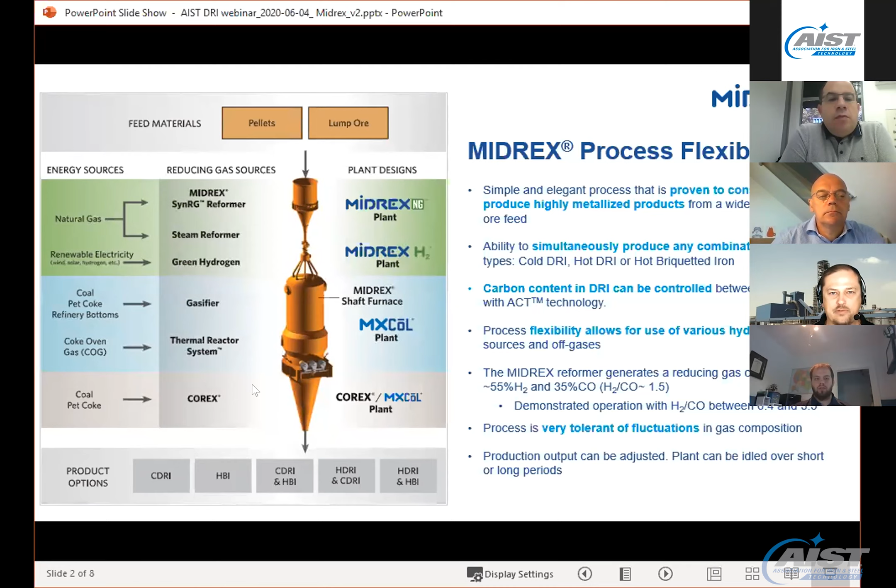So I know the title of the webinar is Ironmaking with Alternative Reductants, but really what the main discussion is going to be around hydrogen. We've been working for several years on an adaptation of the Midrex process to green hydrogen, and we call it Midrex H2. We believe that advances in green energy and power generation and in hydrogen generation from electrolysis can be a game changer for the industry.

Until recently, direct reduction was really limited to places in the world that had natural gas, but hydrogen can be produced pretty much anywhere in the world. So the main driving force for this transformation is going to be CO2 emission and their reduction. And it's generally accepted that the only technology that's proven that can meet the Paris Agreement for CO2 reduction is hydrogen direct reduction coupled with an EAF.

Nowadays, many countries have their own hydrogen roadmaps, and I've looked through some of them, and every single one that I've seen - U.S., Germany, Australia - they talk about hydrogen DRI as the way to achieve those CO2 emissions. And even the IEA, the International Energy Agency, their technical roadmap for hydrogen references direct reduction with hydrogen. So it's really accepted that it is the promising technology for reducing CO2 emissions in steelmaking.

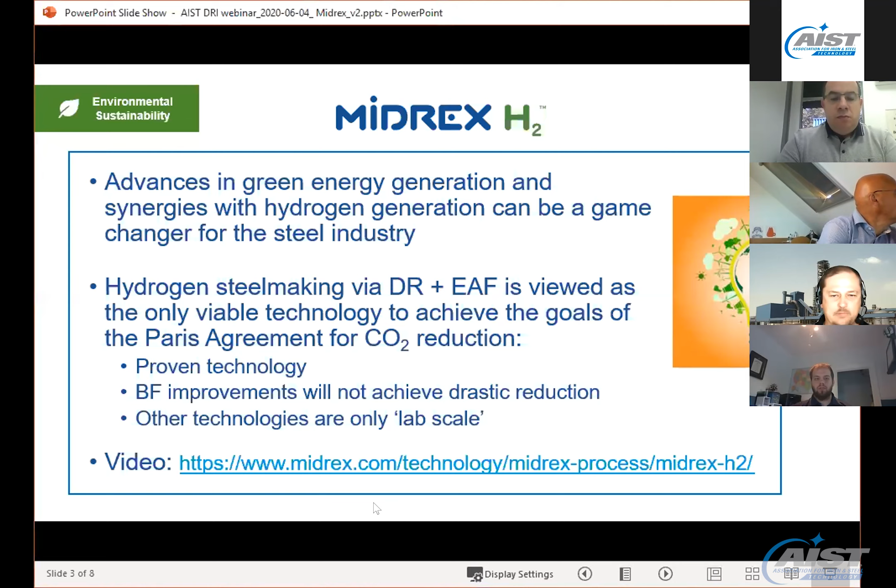We've made a short video, it's about 4 minutes long. I don't have time to show it today, but here's a link to the video, and it kind of highlights how we view that transition. I really encourage you to get on the Midrex website and view that video. It's really well done, and the team put together something that we're really proud of.

So this is the main slide, and it's kind of the summary of what that video shows, which is that transition from a fossil economy to a hydrogen economy, and how the Midrex process can be adapted to switch from natural gas to hydrogen. So with the Midrex process by itself, it's possible to use natural gas and reduce CO2 emission nearly by half immediately, just by switching from coal, coke to natural gas.

The numbers here, the 500 kilograms of emissions, that might seem a little low for people that have looked at these numbers, but here for illustration purposes, I just put strictly the emissions from the Midrex plant, so they are really scope 1 type of emissions.

So as hydrogen becomes available, and we can inject hydrogen into the Midrex process, we put down 3 cases, again just for illustration purposes, and the numbers are just kind of rounded numbers for discussion. But the first thing you'll see is that the amount of hydrogen in the reducing gas goes from 55% to 62, 72, 77%. So these are actually pretty small transitions in the composition of the gas.

That's why we're very confident that we can use these gases for direct reduction, because they're not really drastic changes from what we do typically with a Midrex NG plant, and definitely well within the range of what we've done with other technologies. You also notice that the carbon in DRI is decreasing as you put more hydrogen, and that's strictly because we're putting less carbon molecules from CO and from methane into the process. So there will be less carburization done.

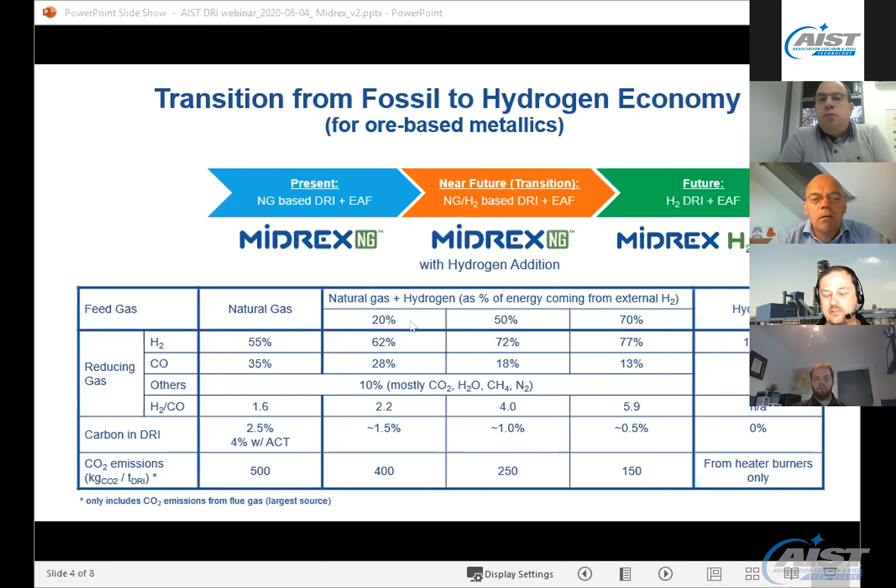The case on the right-hand side, the Midrex H2 100% hydrogen, is the design that we're working on with ArcelorMittal in Hamburg to demonstrate that it is absolutely feasible to produce large quantities of DRI with 100% hydrogen at an industrial scale.

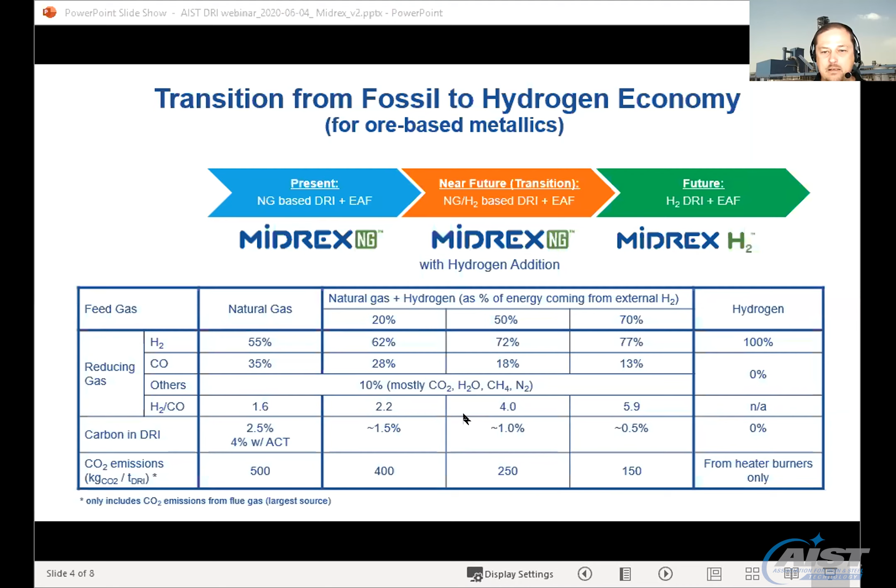The next slide here is an illustration of the Midrex process. So again, we've changed our existing flow sheet that we were presenting before to this kind of simplified format for easier understanding.

But the hydrogen is injected into the process loop, and the location can change, but this is a good place to inject the hydrogen. As we go higher in the amount of hydrogen, we have to have steam in the process, and it's mostly to protect the reformer. So there's a transition point at which steam needs to be added, and the steam can really come from other parts of the plant. If you're an integrated plant, it can come from heat recovery types of systems, it can come from an auxiliary boiler. It's a low pressure steam, so it's a very simple technology.

Also, the hydrogen itself can come from many places. It could come from a pipeline. It can be green hydrogen if you have access to it. It could be any other color of hydrogen. For direct reduction, a hydrogen molecule is a hydrogen molecule. It doesn't matter where it comes from, so we can use it either way.

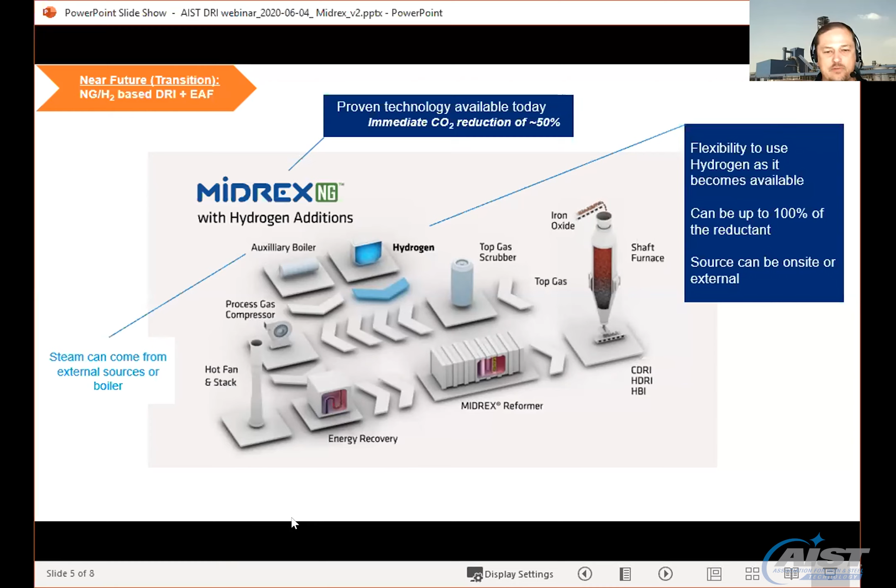There are some electrolyzer technologies that can be better integrated in the flow sheet, especially solid oxide electrolysis, because it operates at higher temperature and low pressure, which are very close to the Midrex process. So if that's the case, we can do a little bit more process integration or optimization of the whole system with that type of unit.

But really, it doesn't matter where the hydrogen is coming from. We know that you can reduce iron ore, and that selection, whether we use an over the fence type of design or an integrated type of design, is more a function of what is available at that particular location. So we're not really selective on any type of electrolyzer technology. Depending which one we want, there are pros and cons.

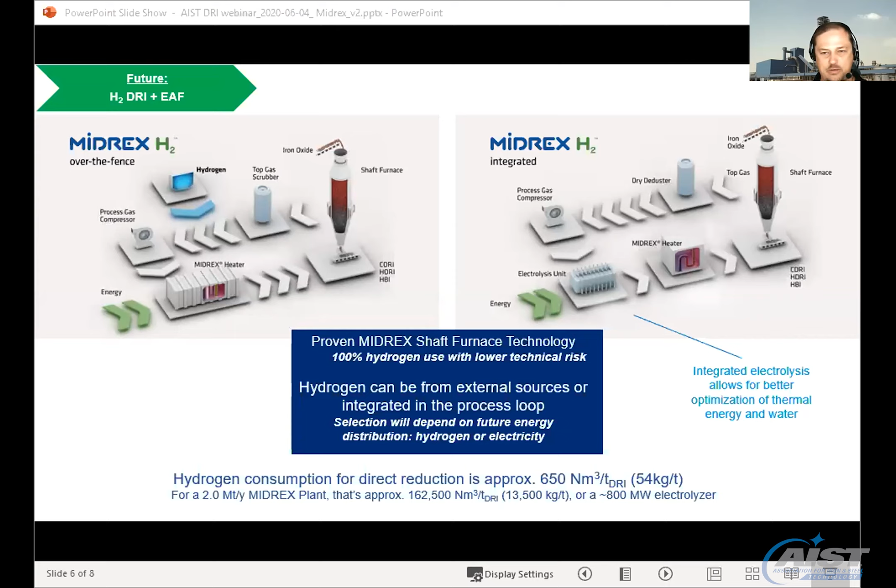So as a conclusion, what I was trying to show is that the Midrex process is a proven technology that can be used today to immediately reduce CO2 emissions using natural gas, but it can also be the bridge technology as hydrogen becomes available in larger scale. It will take years before we can get the volumes that are needed for 100% hydrogen, but it is absolutely possible to build a plant today using a little bit of hydrogen and more as it becomes available. And basically that plant will be ready when the hydrogen economy rolls around.

Our oldest plant is in Hamburg. It was built in 1971. So these plants are really designed to last for a long time. So we think the flexibility of the process makes it very suitable for that transition. And like I said, it's very suitable for the variation of hydrogen availability that we expect, especially if it comes from solar or wind power.

I didn't discuss much of the obstacles for adoption, and that may come up during the Q&A. But ultimately, it is about the cost and availability of hydrogen, and that cost and availability is especially driven by electricity generation. So using hydrogen for direct reduction at scale is not going to be feasible until the cost and availability of CO2-free energy is at the scale that we would truly need.

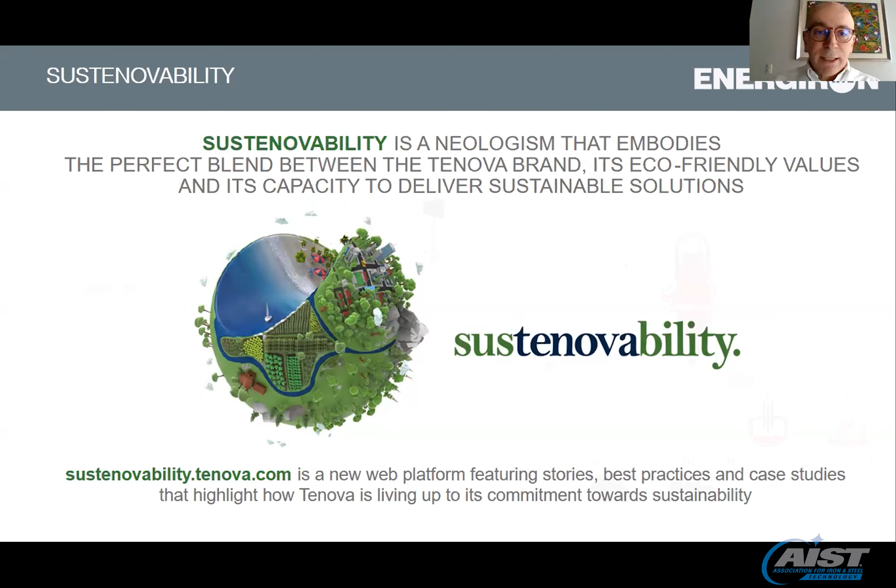Together with Danieli, at Tenova, we keep innovating the Energiron direct reduction technology on the base of proven and reliable solutions. In particular, at Tenova, sustainability has always been a pillar that supports every project that we undertake. And we have invented this neologism that blends the Tenova brand, our eco-friendly values, and the capacity to deliver sustainable solutions. And you may see most of our case study best practices in the platform sustenovability.tenova.com. Let's go to the technical part.

You can see that the Energiron technology has three ingredients. They made us the right solution and benchmark for decarbonization of ironmaking. The three ingredients are: first, we have an intrinsic CO2 absorption plant in our process scheme that allows selective removal of CO2 and the capacity of CCU and CCS. The second part is the capacity of producing high carbon DRI. We're the only one that have produced tens of millions of tons of high carbon DRI, and we will see how this contributes to the decarbonization of the industry.

And the third one is the flexibility. As you may see from the process scheme, the same identical scheme is used for any makeup gas, so natural gas, reformed gas, coke oven gas, hydrogen, a mix of all the above, and also transitioning from one to the other, and also for giving flexibility to the product itself. But let's start from the removal of the CO2.

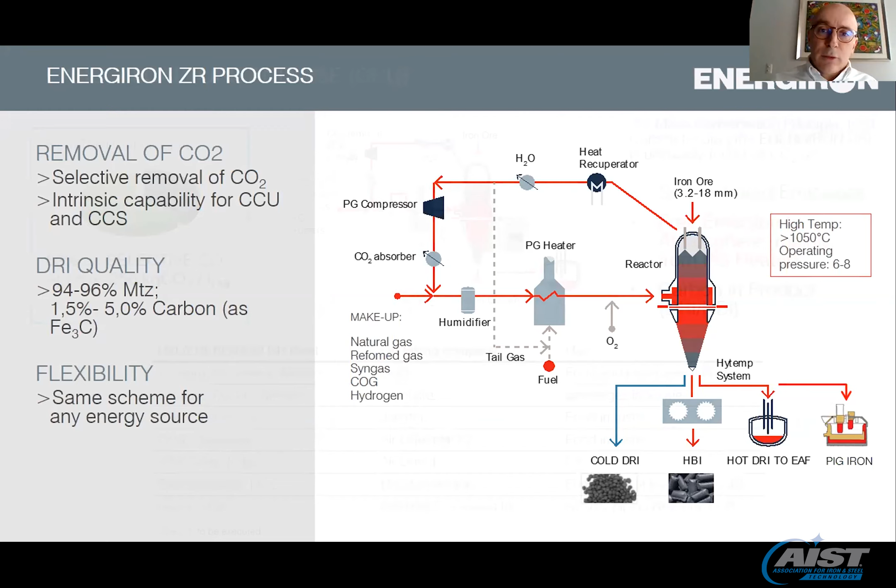If we consider just a simple carbon mass balance, we see that when we put carbon inside the circuit, we have three ways to eliminate the carbon. The first one is with the product. The second one is through emissions into the atmosphere. And the third one is with the sequestrated emission, where we are the only technology that at the industrial level, for decades, selectively removes CO2, up to 62% of the produced CO2. We're talking about approximately 260 kilos of selectively absorbed CO2 per ton of DRI.

And so if we see our users, it's no wonder, for example, that Ternium has been selling CO2 for 30 years, and it's no wonder they've been nominated again this year as sustainability champions by the World Steel Association. Definitely their capacity to sell selectively removed CO2 is a component for them to get this very important prize. As well for Emirates Steel. Last week, on World Environment Day, Emirates Steel highlighted their capacity of CO2 usage for enhanced oil recovery. So in the end, for our users, CO2 is no longer a burden, but actually a source of pride and a source of revenues.

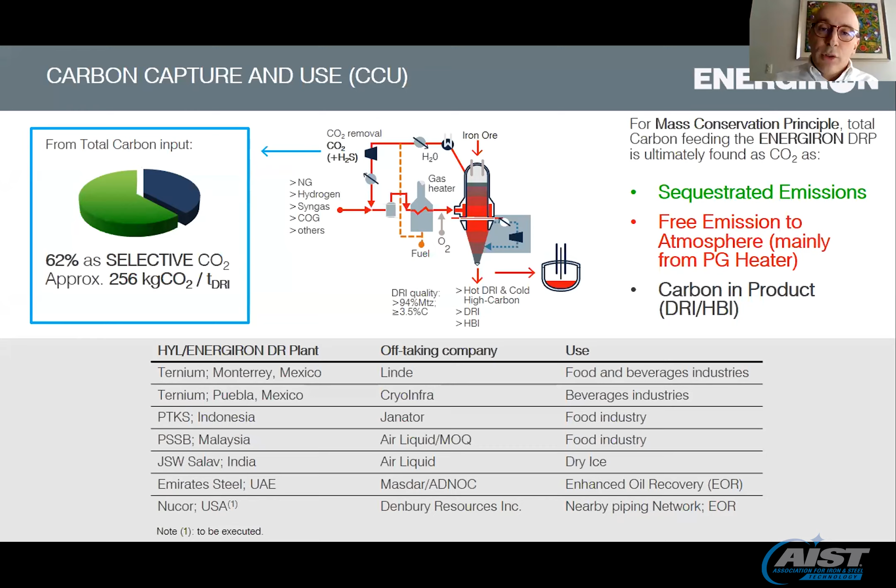That said, we see how the quality of the products may contribute to decarbonization. We are the only one that have proven capacity of producing high carbon DRI, and high carbon DRI, when we talk about 4 to 5% carbon, in the end is pig iron with some gangue. So putting together our DRI technology and our smelting technology, we can produce pig iron directly by charging high carbon DRI to a melting unit that basically just removes the gangue, and we have hot metal. In this way, this solution can definitely substitute blast furnace ironmaking with a dramatic reduction of CO2 emissions.

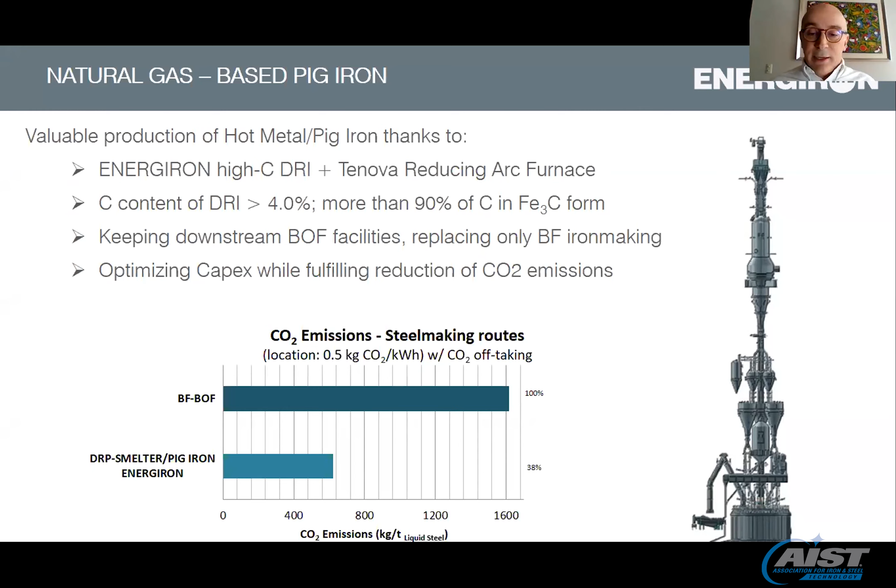Just imagine a case where a blast furnace is to go under relining, but possibly the right solution is to move to this DRI hot metal production. The good thing is that all the downstream plants, so I'm talking about the steelmaking plant with BOF, will remain exactly the same. So we can tap hot metal from a DRI smelting unit directly into the torpedoes and keep all the downstream capacity as it is. If we move then to the flexibility of our source, as I said, our process scheme can work with any reducing gas that is connected basically to the pipe.

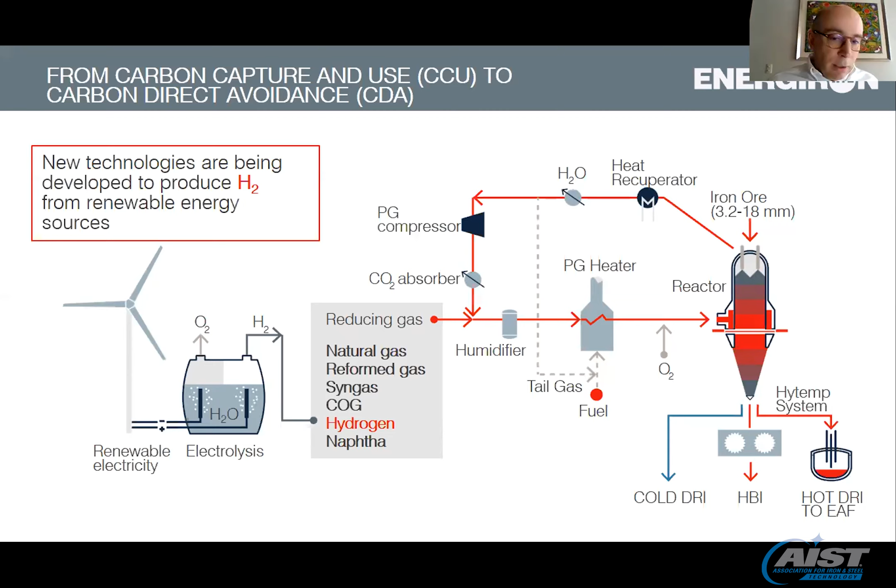And specifically, we can tap also hydrogen coming from electrolysis through renewable electricity. So we can have a plant, an existing plant that works with natural gas, and we can start injecting hydrogen as it becomes available, moving up to 100% hydrogen without any special device.

In particular, if we look at our experience with hydrogen, steelmaking with DRI has always used hydrogen. In our case, particularly since the 50s, we've been using steam reformers. In the plants with steam reformers, we achieve a gas composition that has approximately 70% hydrogen in the process gas. So we have this scheme that is naturally fitted for hydrogen.

We have this experience, but specifically in the 90s, in our pilot plant that was producing 36 tons per day of DRI, we did campaigns with 90% hydrogen. This test provided all the information that we needed to define the process and design parameters, like flow temperature correlation, reactor L/D ratio, operating pressure, solid residence, etc. So we already have the data to design correctly a plant that can work without any problem with 100% hydrogen.

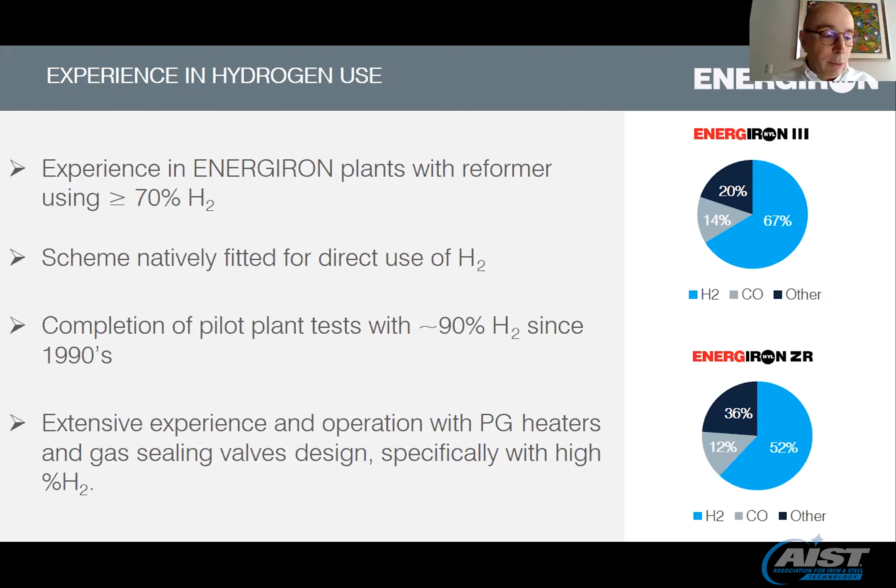Also from the mechanical viewpoint, we have equipment that has already been working with a very high percentage of hydrogen in our industrial plants. And from an energy point of view, we can see in the first graph that the process with hydrogen has 6.6 gigajoules per ton of DRI as hydrogen, plus an additional 1.6 gigajoules per ton of DRI as fuel. This is very low also because we take advantage of the high pressure condition in our scheme, which is very beneficial when we treat a very low density gas like hydrogen.

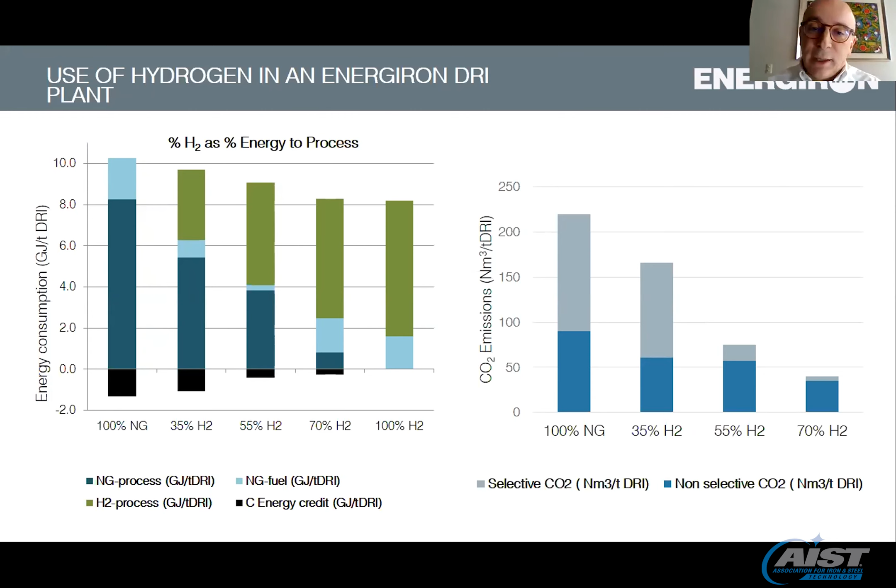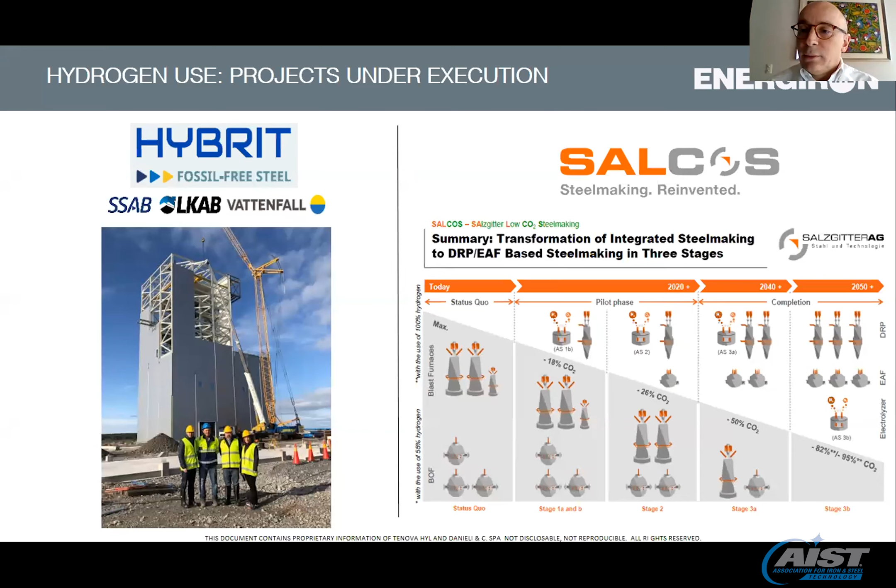So you can see from this graph how the idea is to start shutting down blast furnaces and converting their plant to electric steelmaking with DRI produced via hydrogen. To summarize the benefits of our technology, if we make 100 the CO2 emissions of a blast furnace together with the BOF, we do have some small gain by adding DRI or HBI to the blast furnace. But really, the big change is when we move to melting DRI, either in a melter for production of hot metal or in an EAF to produce steel.

And together with our capacity of CO2 selective removal and commercialization, we are the benchmark in terms of CO2 emissions for the ironmaking industry. This is a typical case in a location like Europe, where the carbon footprint is 0.5 kilos of CO2 per kilowatt hour. With our standard technology with natural gas, we can achieve less than half the CO2 emissions of a blast furnace, and of course much lower using hydrogen.

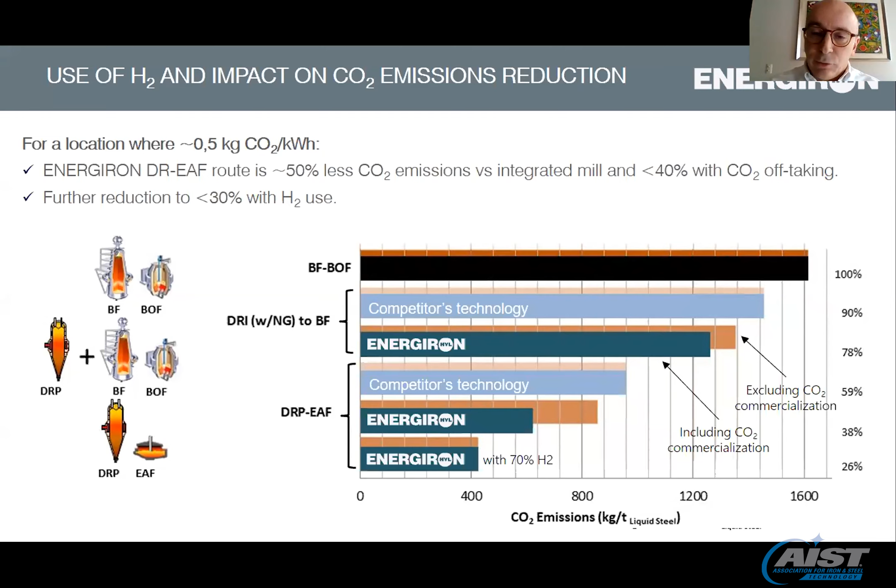Hydrogen can reach 100%, of course, but we consider that there is a sweet spot where there is a balance also with the carbon that is needed in the steel for the final reduction of iron oxides. With this, I've finished my presentation.

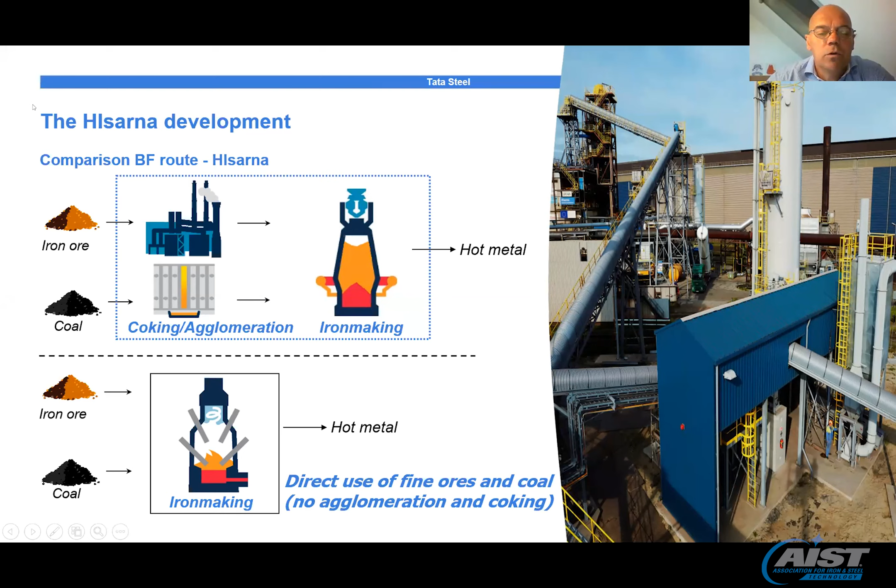In HIsarna, we skip the complete coking and agglomeration steps. Iron ore and coals are directly injected into the HIsarna vessel, and we make use of the fine ores and the coals. So in principle, no agglomeration and coking is necessary. And the same hot metal is produced and can go to the steel shop. What are the benefits of HIsarna?

HIsarna offers a high level of economical and environmental benefits. Looking at the economical benefits of the process, which has been developed at Tata Steel since the 80s, you can process it with low-cost raw materials. You can use non-coking coals and low-grade ores. You can use recycled waste oxides, slags, and galvanized scrap. And this has been processed in the pilot in IJmuiden.

You have a very high energy efficiency, and you can have greenfield developments, so much lower capex. The environmental benefits are lower CO2 emissions. There will also be lower SOx, NOx, dioxins and fine dust emissions, you avoid dumping slags and dusts, and you can use mining reverts.

A benchmark of the process has been done in the ULCOS project. ULCOS is the European initiative for Ultra-Low CO2 Steelmaking. When you compare HIsarna with the average European blast furnace operation, you can see a significantly lower CO2 emission based on what has been done in ULCOS.

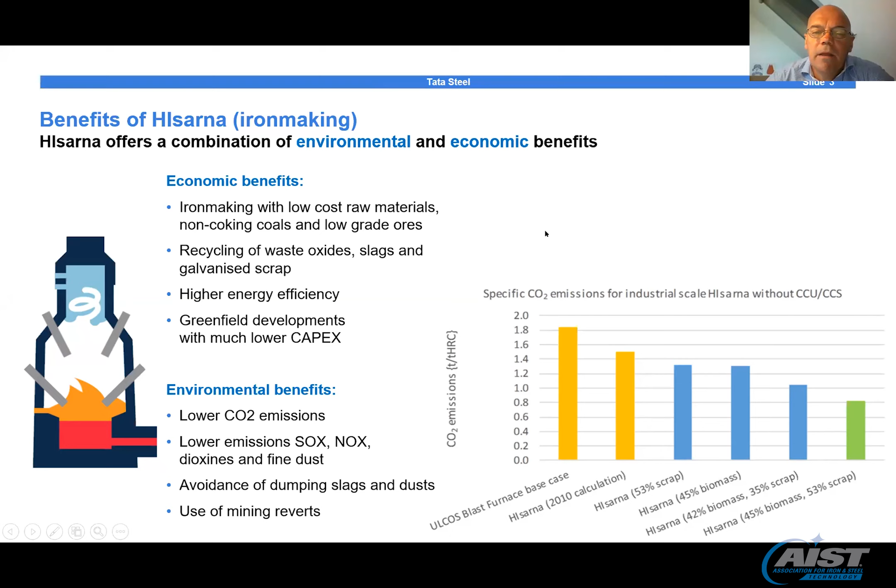This was a scenario analysis, and then the pilot plant was designed at the IJmuiden steelmaking site, where we have had several campaigns. Those campaigns were first part of the ULCOS consortium, where the plant was designed and erected, and in 2011 we had the first metal tap. That was the first campaign.

Then in 2012 we went into the second campaign, with a very long operational period. We found out that the process is working well, then we started optimizing it, and the first hot metal was delivered to the BOS plant. And you also see a gradual reduction of the carbon consumption in the process.

This was succeeded by the fourth campaign, where we also tried recycling of scrap and high zinc oxides, and that went successfully. At the end, we came to a considerably low coal consumption rate in that campaign. That gave confidence to all the partners and to Tata Steel. Then we decided to do a major plant revamp, and we expanded the plant, for example by adding a coal grinding facility. Overall, that was an investment of more than 20 million euros.

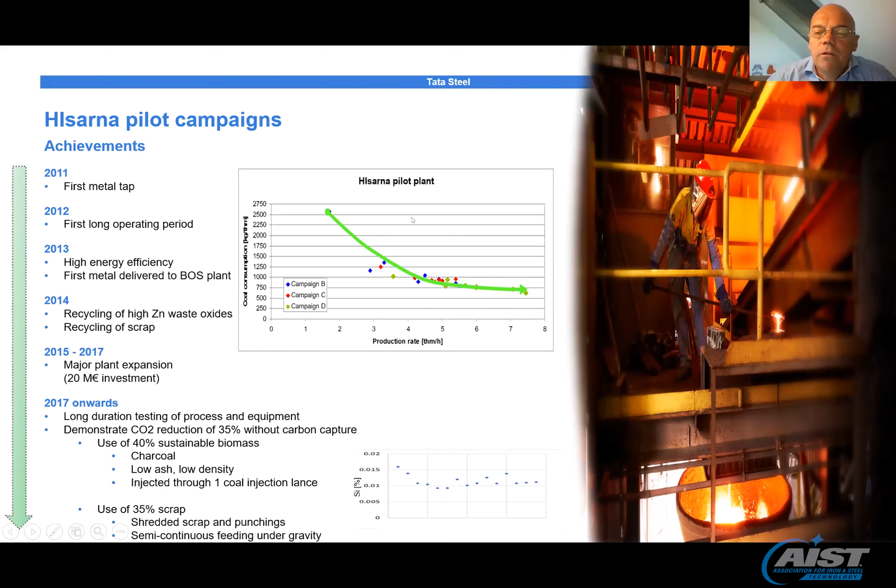Therefore, we used 40% biomass, which was charcoal with low ash and low density, and this charcoal was injected through one of the coal injection lances. In addition, 35% scrap was used, consisting of shredded scrap and punchings, and this was added to the vessel using gravity. You also see that you can go to quite considerably low silicon values in the hot metal, which is then delivered to the steel shop.

Now, what are the tests? The test with biomass and scrap that is possible in HIsarna. We demonstrated that. We collected over 200 tons of charcoal that was prepared in the grinding lines, and then in one of the injection lances, it was added to the bath of the process. So there was a coal replacement of about 45%, and that meant roughly 1.2 kilogram of biomass per kilogram of coal, and that had a fossil carbon reduction of about 35%.

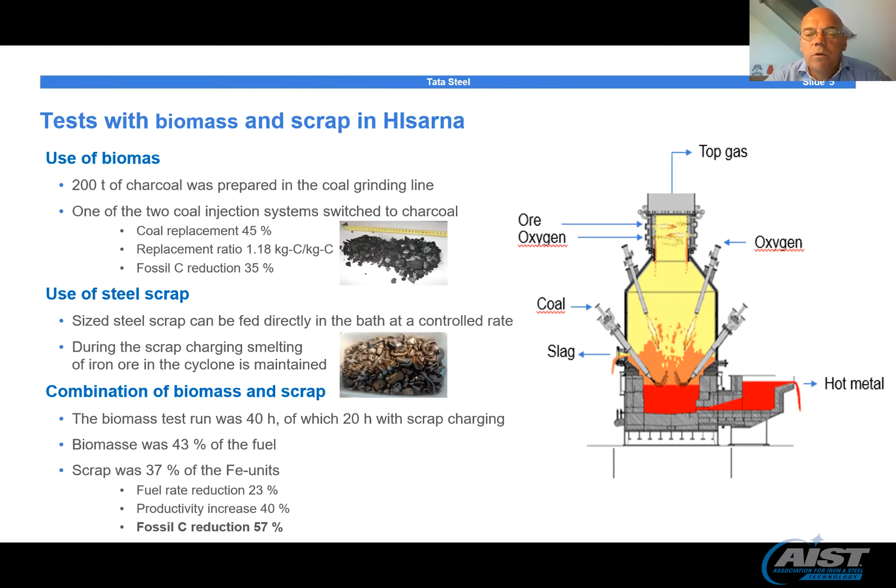Also, scrap. The scrap was used. It was sized scrap. It was directly fed into the bath, and the combination of biomass and scrap, where we did a biomass test run of 40 hours, and in those 40 hours, 20 hours of scrap was used. The biomass was roughly 43% of the fuel, and overall the scrap was 37% of the iron-bearing units, and this gave a productivity increase of roughly 40% and an overall fuel rate reduction of 23%. So the fossil carbon reduction was more or less 57%, which was demonstrated in the pilot facility.

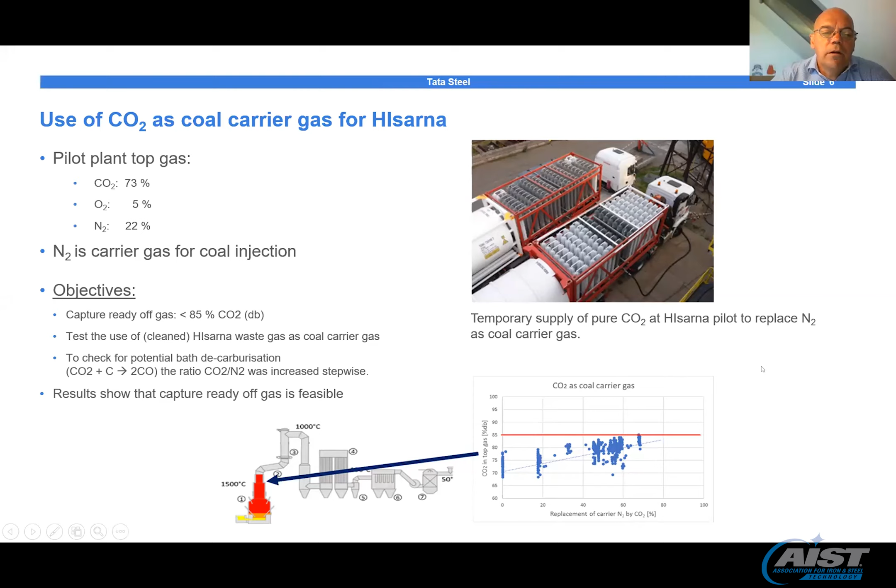Also, we want to go to higher levels of CO2 in the top gas. The pilot plant top gas is roughly 73% CO2, 5% oxygen, and 22% nitrogen. Now, to make this CO2 more applicable for further uses, the amount of CO2 in the gas from the reactor needs to be improved, and therefore the gas which injected the coal into the bath was replaced by CO2. And that was gradually increased, and you could see that at a certain moment, 85% of CO2 could be reached, and so that means that this gas is capture ready, and that is feasible.

Also, what we are doing at the moment, we try to make this gas ready for usage for other purposes, like enhanced oil recovery, or using it for greenhouses. And therefore, as the CO2 level in the off gas is already up to 85%, you can do the carbon capture with the cryogenic method. And this has been proven by TNO, and TNO proved that it is possible. And therefore, at the moment, we are doing an extensive FEED study to make this happen.

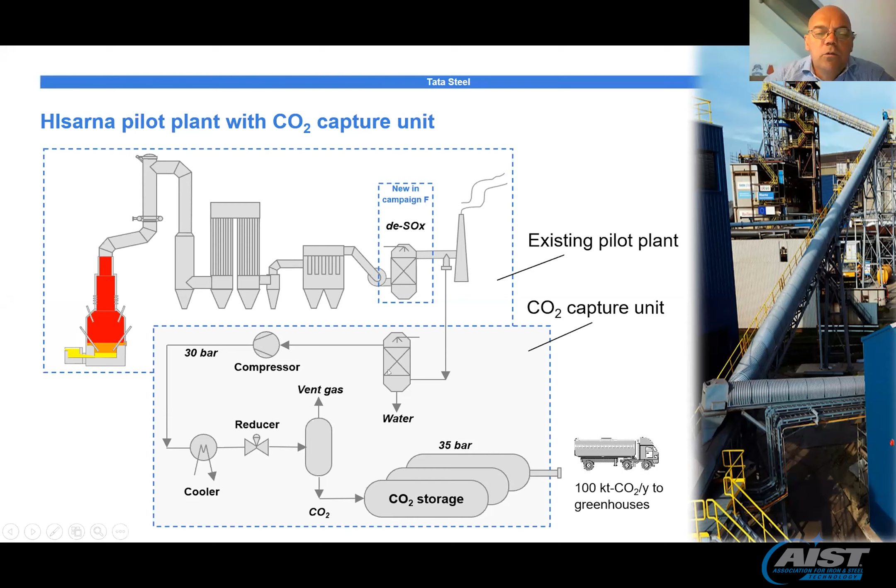And therefore, we also think that the HIsarna demonstration plant is foreseen to be capture ready. It also provides low phosphorus hot metal for critical steel qualities. It enables recycling of LD slag. We produce hot metal at quite a competitive price, and it allows the connection to future CO2 capture and reduces the CO2 emissions of the site.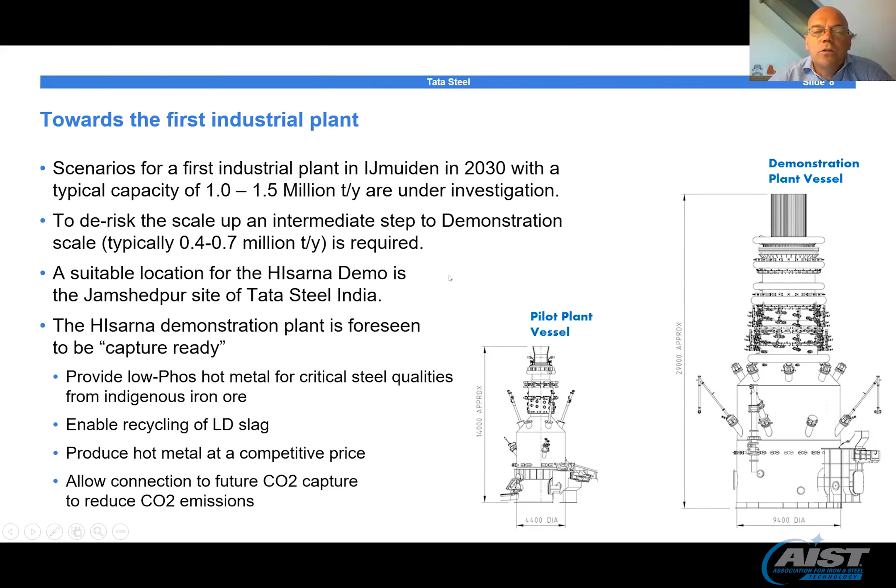In conclusion, the steel industry has a lot of shelf solutions available for climate change, and also on circular economy issues. And almost every potential solution holds an uncertainty, a development risk, and an increased cost. HIsarna is an iron-making process for a greener and circular economy. After 10 years of development at the pilot plant in IJmuiden, this is now close to completion, and scale-up to industrial still holds a considerable development risk, but an incredible potential can also be foreseen.

And cooperation is the buzzword which has been the HIsarna process for all those years. It started in ULCOS, and new partners in the pilot scale capture plant, which needs to be constructed at the HIsarna pilot plant, are welcome, and that's possible.

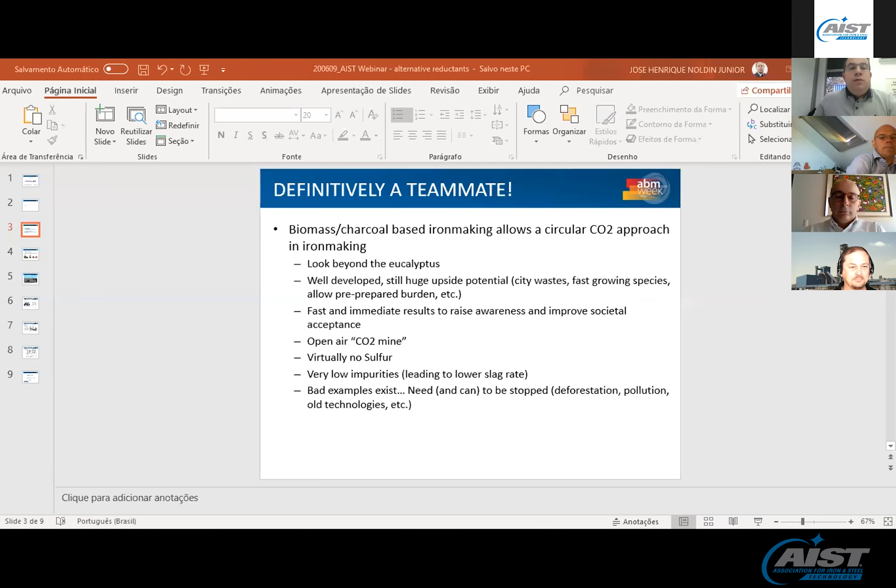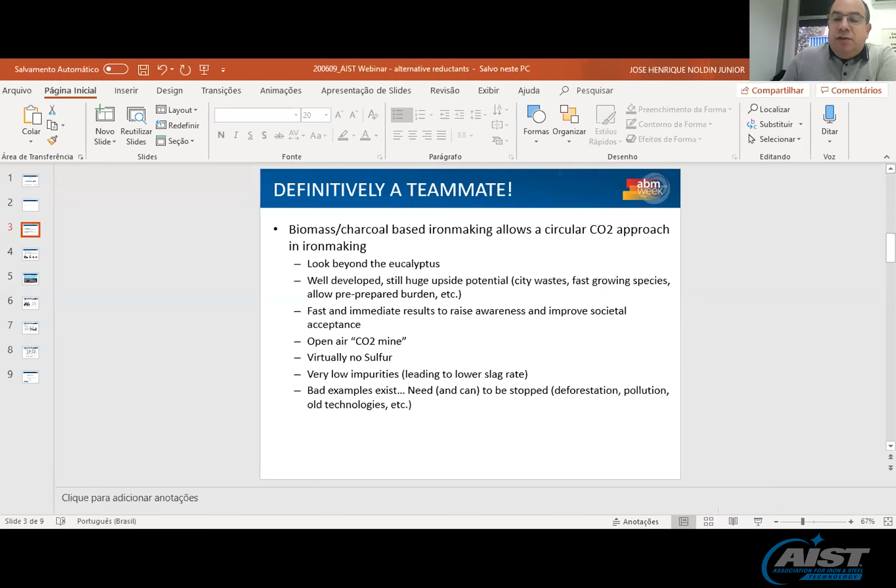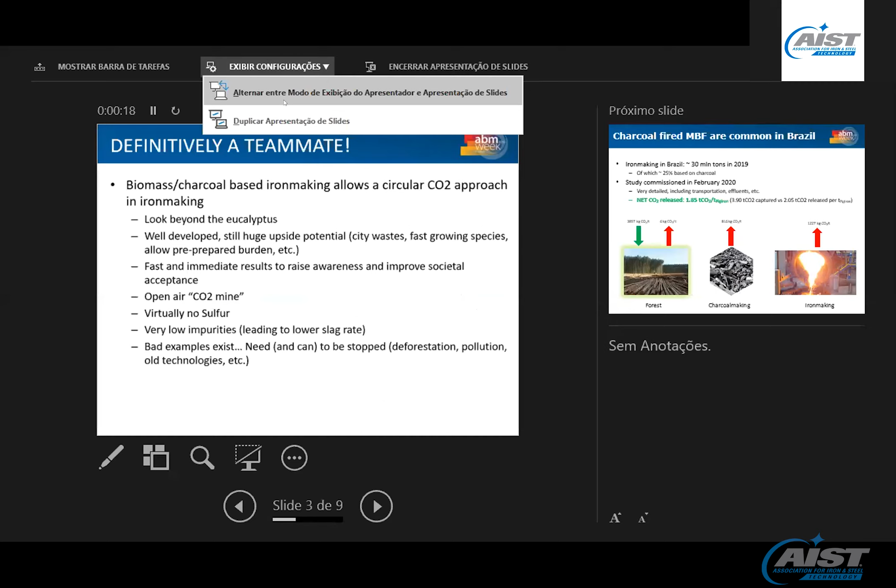How about now? Yeah, now we see it. Okay, not so bad. Let me, I need to, there is a small button here. Good, and now, still there? Yes, okay, sorry for the trouble. Now you see it in presenter mode. But you see only one screen, right, or not? Now we see two slides at the same time. What should I do here? This one? Try it. This one? There you go. Good, perfect. As you can see, we are all learning, me especially on this one.

We also believe that biomass and charcoal would allow fast and immediate results. I believe we are all in a sort of a grace period with society, so people are still patient about what can be done to reduce CO2 in steel production. I personally believe we need some quick results, and biomass and charcoal can allow that.

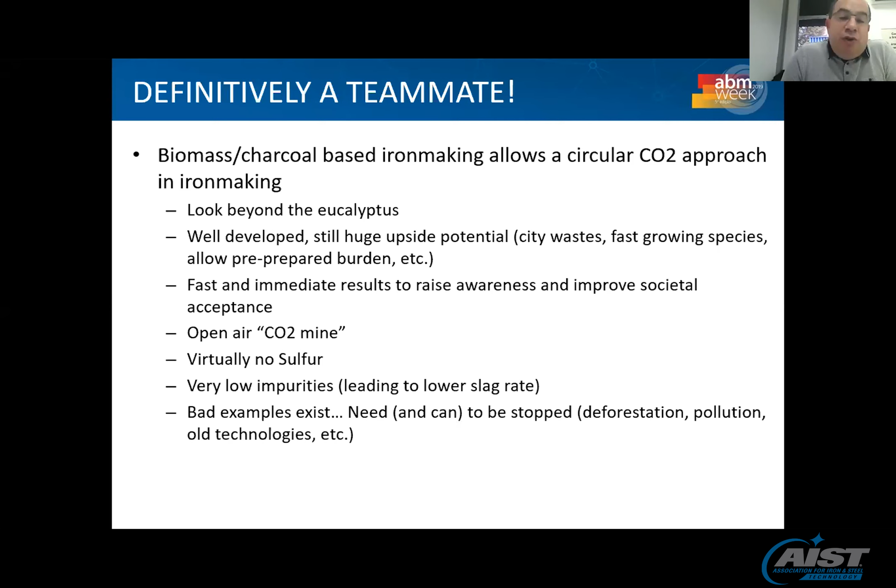We would use CO2 actually as a raw material, so it would be a mining of CO2 from the open air to production of the biomass. Virtually no sulfur from biomass and very low impurities, which brings another additional advantage: low slag rates. I also believe we need to recognize that some bad examples exist, and these need and can be stopped - deforestation, for example, pollution in the production of charcoal, use of old technology, etc. These are still there, and we need just to fight them.

Taking a specific case in Brazil, just to put some numbers: iron making in Brazil, production last year was 30 million tons, of which a quarter was based on charcoal, so quite well established. There is a very recent study from the Industry Federation in Brazil, last February, where a full life cycle analysis was done with updated techniques, taking good examples, all included - transportation, effluents and so on.

In the production of iron using charcoal and biomass, there is actually a capture, not a release, of CO2 - close to 1.85 tons of CO2 per ton of pig iron.

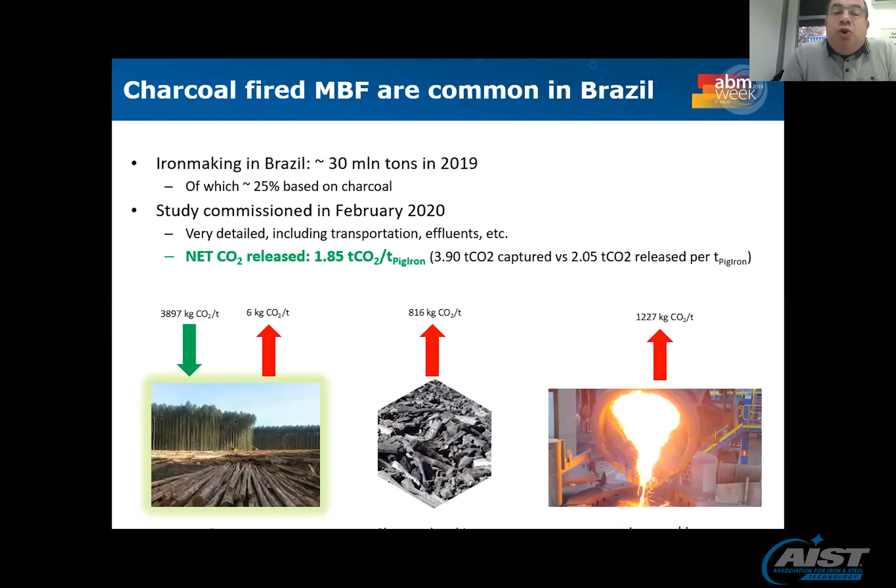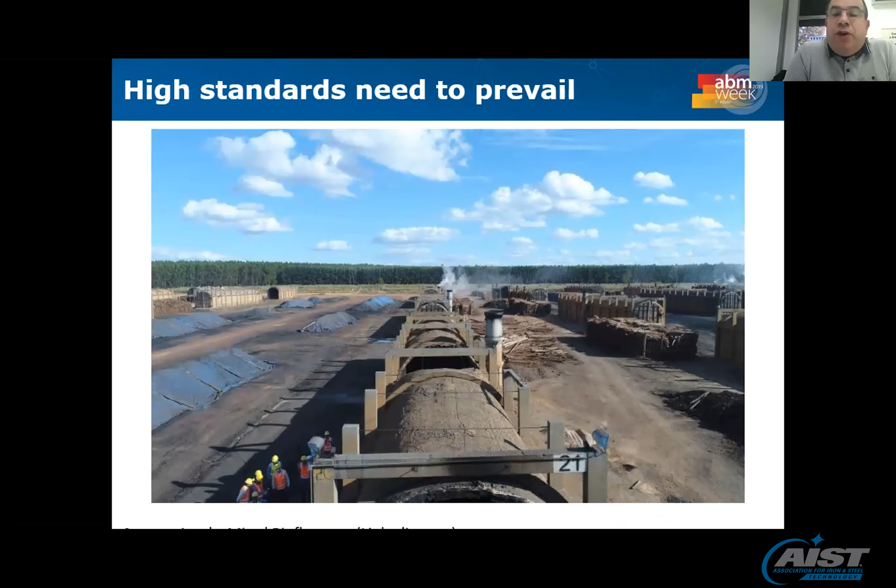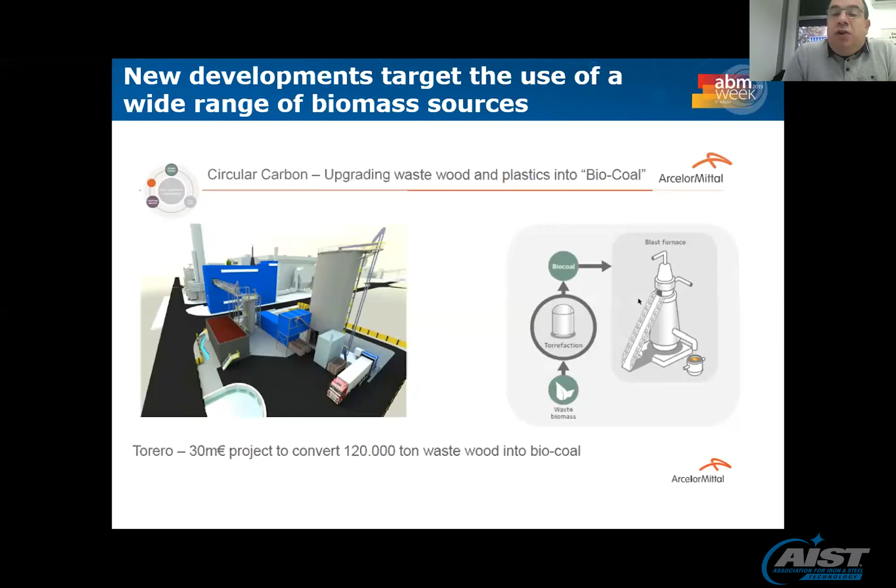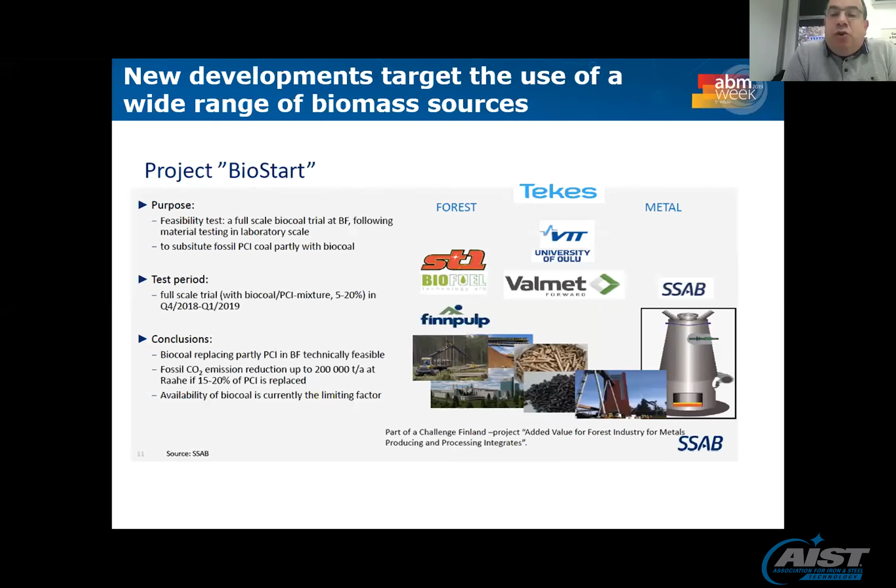We see some good examples - this is from ArcelorMittal Bioflorestal, a very high-tech production of charcoal. There are other projects in the world, for example ArcelorMittal with the Torero project, where they plan to make biocoal to inject or use in different ways in the blast furnace, as well as SSAB with the BioStart project, where they made a few tests and showed it to be technically feasible to use biocoal as a PCI replacement. That will bring immediate results, which can be quite interesting.

And my favorite, of course, in Brazil, Tecnored, where carbon can be used as a reductant and also as a fuel, using different species, different sources of wood, different sources of waste streams or food residues that can be carbonized, generating green carbon to be used as a reductant but also as a fuel in this novel technology, which is currently under industrial implementation.

These are just a few examples that go beyond the eucalyptus or even beyond the mini blast furnace, which is so well known in Brazil. To wrap up my presentation, the idea we want to put forward is not that charcoal and biomass can be the one solution for lowering CO2 in steel production, but we actually believe that if well played, biomass can be introduced to contribute to the decarbonization efforts.

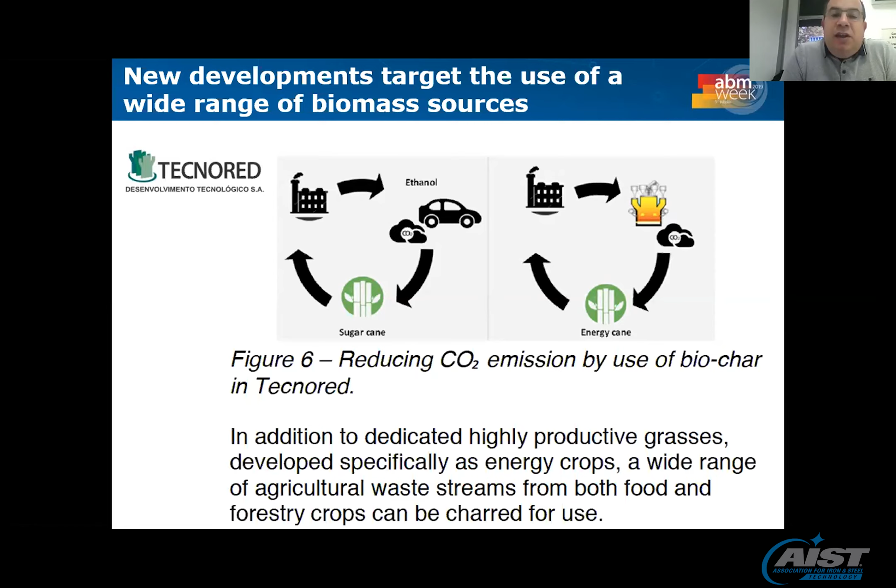Making a little bit of advertisement, this is actually what we want to discuss at the next International Conference on Energy and Material Efficiency and CO2 Reduction in the Steel Industry, which will be held in Brazil in 2022 within the ABM week. This is a well-established conference, after Germany in 2011, UK in 2014, and Japan in 2017. With that, I hope to convey these last remarks on biomass and charcoal, and finish my presentation.

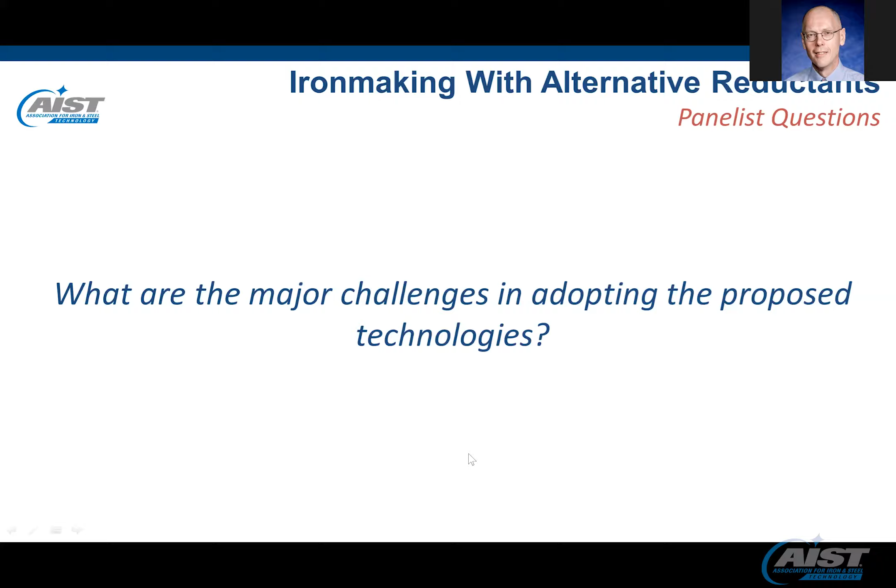So I'm going to go off script a little bit. Anna put this presentation up with some questions, but there were several questions in the Q&A related to the general energy balance of the DR process when using 100% hydrogen. I'd like to ask Stefano to make some general comments on the total energy consumption of a typical natural gas unit versus a system with 100% hydrogen.

Yes, sure. The key in the transformation from natural gas to hydrogen is kinetics. Hydrogen, both from laboratory and what you study in your chemistry book, but also what we experienced in our pilot plant in the 90s, is the best reductant available for iron ore. Although the reduction with hydrogen is endothermic compared to the one with CO, which is exothermic, the overall balance—taking into account both thermodynamics and kinetics as the major impact—is why we cut overall energy consumption from about 10 gigajoules per ton of DRI down to 8 when we use hydrogen. And again, with our technology, you can do this transformation a little bit at a time with the same plant: start reducing natural gas, start increasing hydrogen at the level of availability and the economics of the plant.